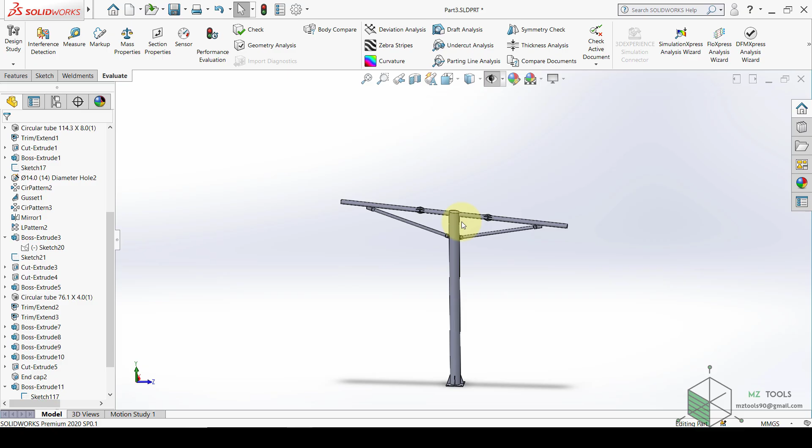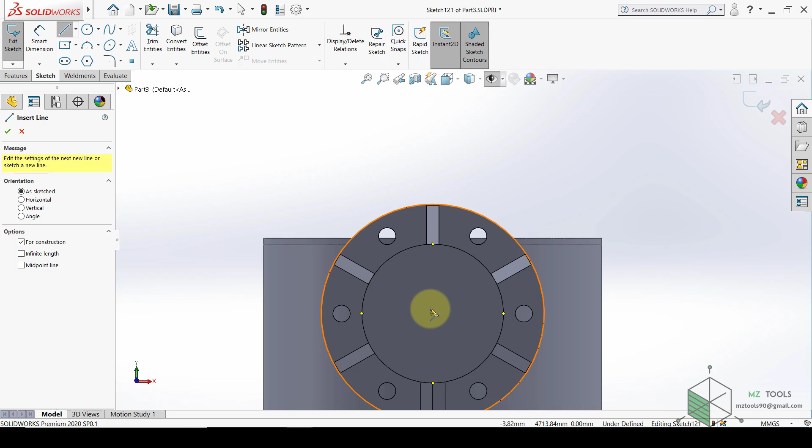Then we need to draw the plates that will hold the purlin. So we need to start a sketch on this face. And then select a center line, snap to this point, and then pick a point and draw another point on the intersection between this edge and this line. After that, set a distance between the point and this one of 100 millimeters.

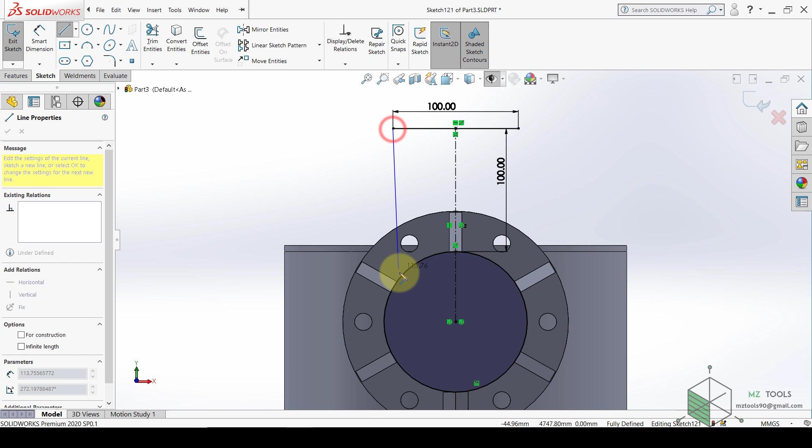Then convert this edge and select midpoint line, set this to 100, and then draw a vertical line and set it, and then draw a circle. The diameter should be 14, and this distance should be 32, and this distance here should be 18.

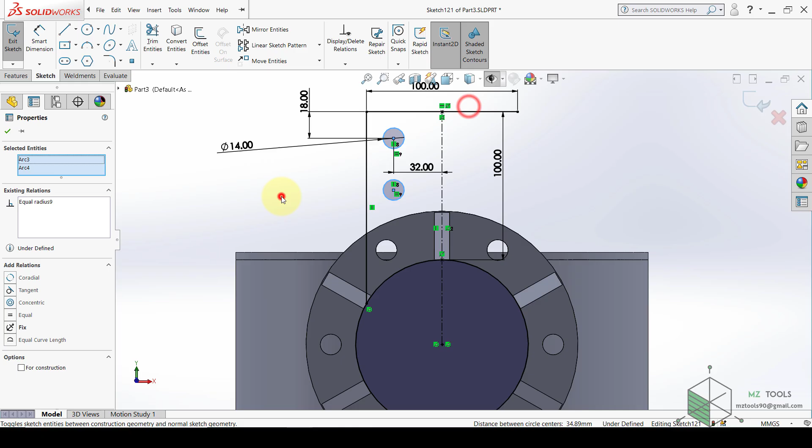Then draw another one, select these 2 points and make them vertical. Then make the 2 circles equal, and then set a distance between them of 50. Once done, select mirror entities and select this circle, this one, and this line, and mirror all of them about this line. Once done, select the trim entities and trim this part.

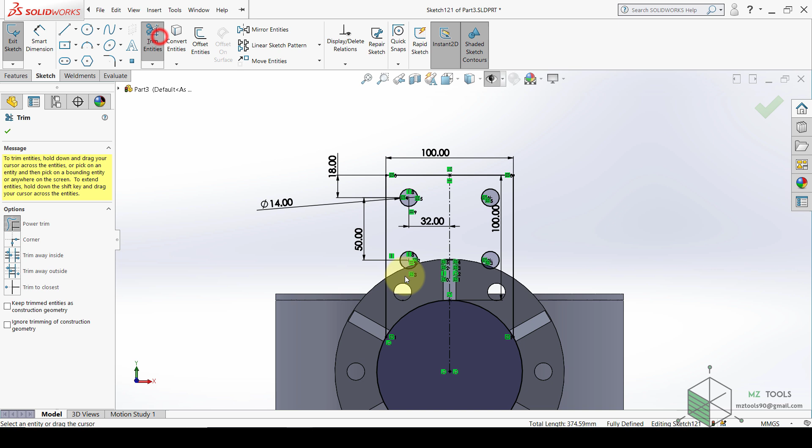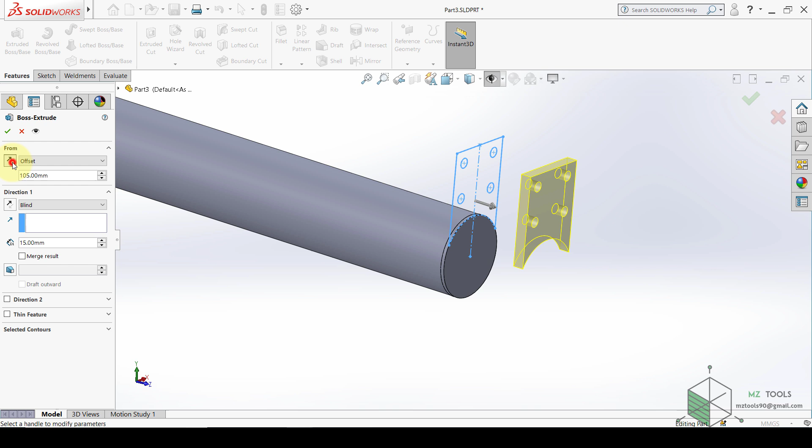As we know, the thickness of this end cap is 5 millimeters, so we should extrude this sketch 105 millimeters away from this face. So select extrude, and this time instead of sketch plane, select offset and set this to 105 millimeters, and make sure to flip the direction and set this to 15 millimeters. And it's very important to have the direction of the extrude to be this way. So the distance from this face here up to the end should be 105.

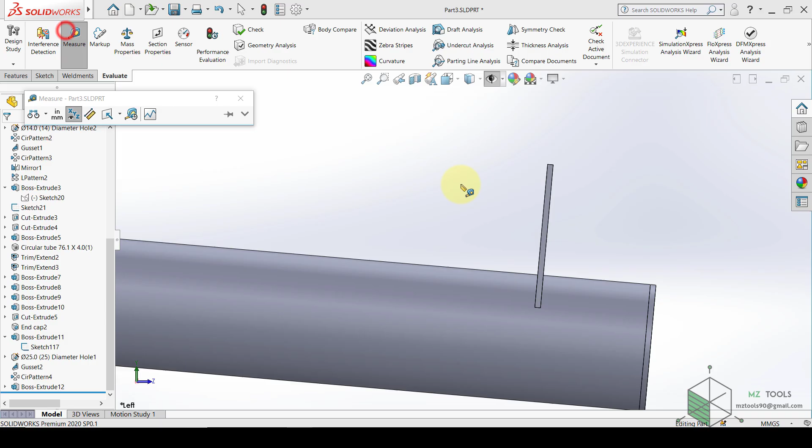Let's double check this. Go to evaluate, measure, select this face and this one. And here the normal distance between them is 105, which is correct.

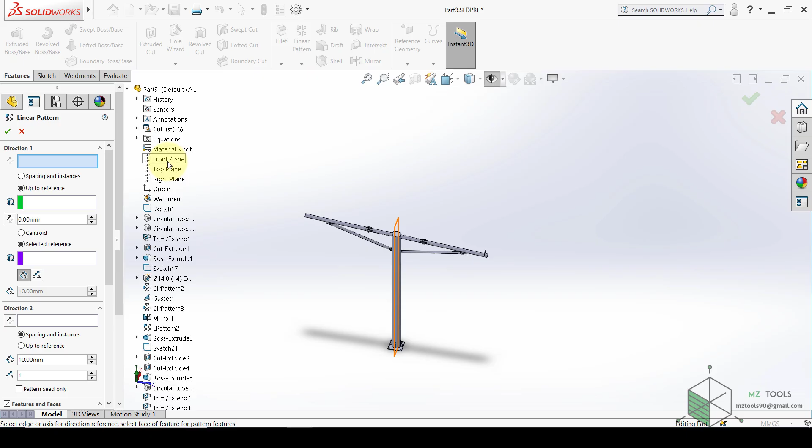After creating this plate, we need to go to Features, Linear Pattern, then select the right plane, and here spacing and instances. Instead of 10 millimeters, hit equal, global variable, and then C to C. And the number is 2. Then go down to bodies and make sure to select everything. Then hit OK.